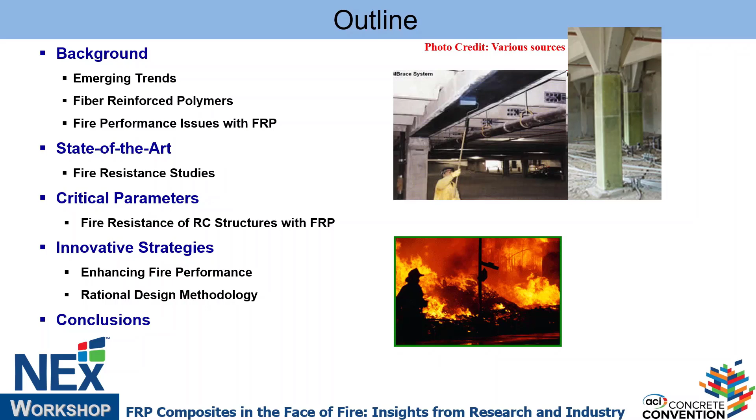As we all know, here we are all experts in FRP as well as in the construction sector. Deteriorating infrastructure is a worldwide problem, especially with respect to reinforced concrete and steel structures, where corrosion is a major issue, along with age-related problems. Secondly, as lifestyles improve and more research and development occurs in most countries, the performance of structures built in the 50s, 60s, 70s, and 80s is being upgraded to account for higher earthquakes, blasts, impact, and other loading types.

Also in the emerging world, the number of buildings is growing. For example, a 6-story building at an airport now wants to add another 4 stories because there's no other space, so they want to strengthen those structures for enhanced capacity. This is becoming common—less so in the US, but outside due to land values and similar factors. According to a health report on US infrastructure by ASCE, this problem is huge even in the US, estimating $3.6 trillion will be spent in the next 10 years. So the construction industry is looking for solutions.

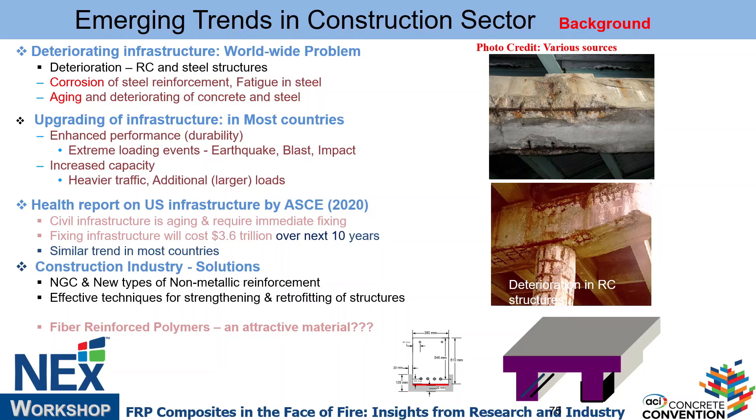FRPs are a feasible and attractive solution for this. Why? In terms of application, it can be used internally or externally. Internally, you can replace it as primary reinforcement, as Steve showed us to some extent, or use it for pre-stressing. Externally, you can add small plates like credit card chips underneath a bridge for flexural or shear strengthening, and on the sides add externally bonded reinforcement, or more attractive, near surface reinforcement, where you cut through and insert bars or strands and fill with epoxy or concrete. This offers either internal or external reinforcement—two types.

FRP has a number of advantages—high strength, lightweight, ease of application, among other things—I won't get into all of them. But there are disadvantages as well. It's brittle, and bond is a major issue. In externally bonded applications you only get bond on one side, unlike when inserted internally where you get bond on three or four sides. Also, FRP is a combustible material, so fire can be an issue, especially when directly exposed to fire, as in the case of externally bonded reinforcement.

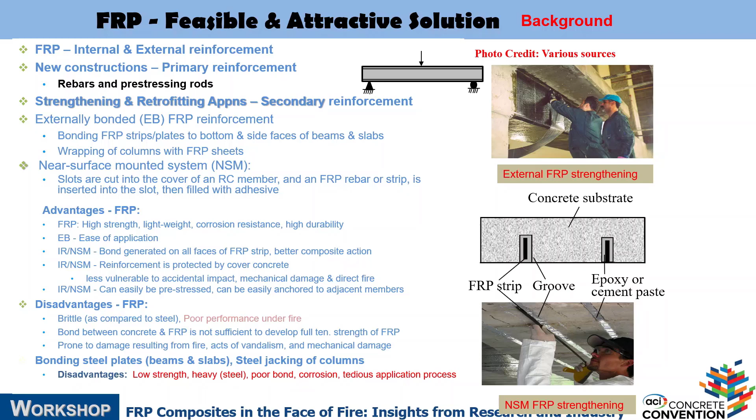But having said all this, it's a much better option than what we used to use, steel plates, which are heavy, right? And even installation is a big problem. So this is a better solution, but we need to address the fire problem.

Why? Fire represents a severe hazard and threat to the built environment. It causes thousands of deaths and billions of dollars of damage every year in every country around the world. Unlike earthquakes, which happen mostly on the West Coast, unlike tornadoes, which are only in the Midwest, unlike hurricanes, which are mostly on the East Coast or the South, unless it's snow, which is only in the northern part, like Michigan or Wisconsin.

But fire is a universal problem. From a small village in Minsk, Russia to Santiago, Chile, fire is a significant hazard to the built environment.

Now if you see the statistics, there were more than 1.35 million fires, out of which 486,000 fires were called structural fires. They grow to the full extent where they can do some level of damage to the structures itself, right? Total losses were more than 50 billion dollars in addition to 3,800 deaths. This was in 2021. So when it happens, fire represents a severe hazard, not only for people, but also for the structure as well as the environment.

It's one of the worst conditions faced by a structure during its lifetime. It can happen through an electric short circuit, as simple as that, accidental, or intentionally through vandalism. Or after an earthquake, a lot of times you have fire. Look at Kobe earthquake, San Francisco earthquake in 1906, Northridge earthquake, also New Zealand earthquake, Chile earthquake. Post-earthquake fires are common. After a truck hits a bridge, the bridge is designed for that impact load, but not for the fire following it.

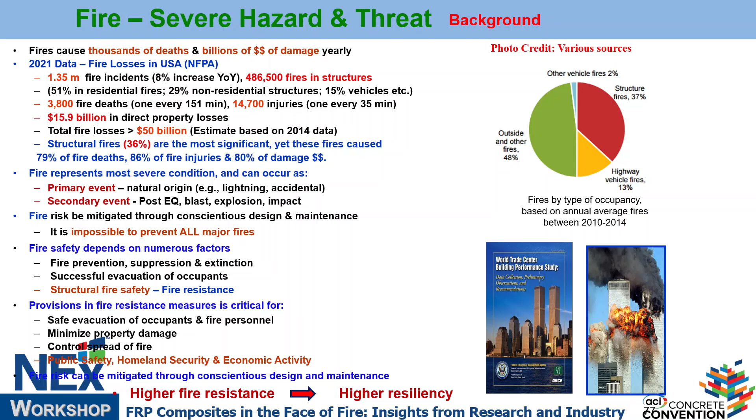Basically as simple as that, that's fire resistance. And it's very important, especially from the resiliency point of view and the life safety point of view as well. Higher the fire resistance, higher the resiliency of the structures. I don't want to get into too much into this.

Fires are real, and it's happening as we speak. A lot of times we assume that fire is a rare event, that it only happened in 9/11, after that no - every year there are fires happening as we talk right now. This is one example - New York City, Bronx, on January 6, 2022, in an apartment building. The residents were mostly an immigrant community. In fact, language was an issue as well.

They were warming themselves up with a space heater, a block heater, because fire affects poorer sections of society much more than rich and affluent sections - weaker sections of society, whether it's elderly people, women, pregnant women, whoever - a weaker section of society, because of their lifestyles, because of the expensive nature of having fire protection systems as well. So in this case, they were warming themselves, kids were playing, it goes out of control, exit paths were not working, a number of things were not working.

8 children plus 19 deaths, right? 3 days before that, the same thing repeated in Philadelphia.

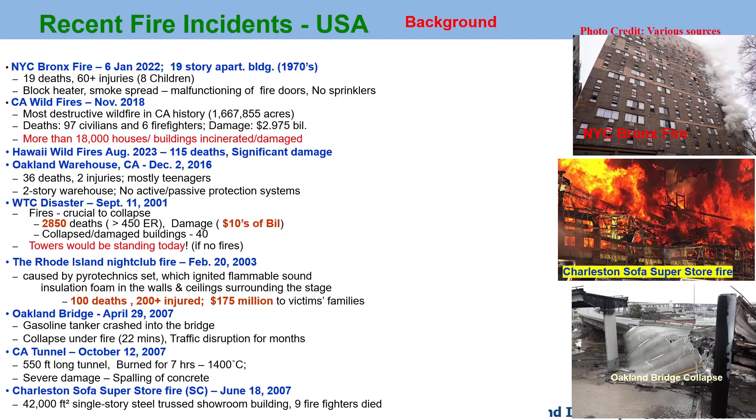Same thing, 18 people died. So this keeps happening, and it's not just buildings alone. I don't want to get into each one of them. You all know what happened on the I-95 bridge in Philadelphia.

This bridge was basically a steel girder bridge with concrete decking on top. An oil tanker carrying 8,500 gallons of fuel flipped on its side. A huge fire starts, fire department comes in quickly, but there's still no way the girders can withstand the fire, and the spans collapse. It took weeks to resolve the resulting supply chain issues.

Remember, in bridge fires, life safety may be of lesser importance. People don't die that much, right? But what happens is the property damage, and following that, these days it's all about traffic. Everyone, we live most of the time on the road rather than in houses.

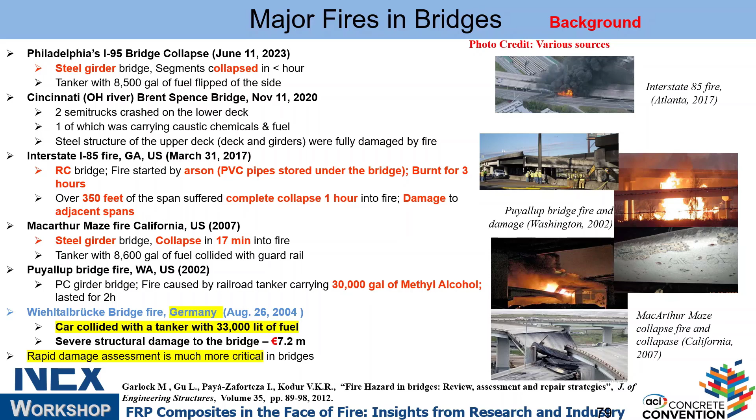So that's why, as Steve said, there's a rethink on these regulations. Now, it's not just one type of incident. As you see, what happened with the I-85 bridge outside Atlanta Airport on I-85 highway? This bridge was in very good condition, reinforced concrete piers, pre-stressed concrete girders. They inspected it in 2015, found everything fine, and the bridge received a good rating. But they found out there were drainage issues.

To fix that, they brought in PVC pipes, and I don't know if you can see that there or not. So they assembled all of them. In the US, our construction season starts in May, so they went away after putting the pipes in February.

A homeless person comes in - this was based on the investigation. It was a very cold day in Atlanta, so he wanted to warm himself up. He put some rubble together and started a fire to warm himself up, with papers and so on. Then he was drinking as well - they found beer bottles right next to him after the investigation was done.

Then it spreads into a fire. A huge fire starts, somebody calls the fire department. It's a major highway. Then, when the fire department came in, they couldn't fight the fire.

Now you know what spalling is - Steve showed it in those girders, right? Now you can see here, huge spalling. They couldn't fight it because fragments were hitting them like bullets. It's called mini explosions. So they couldn't fight the fire. Spans collapsed, and it took weeks or months together to fix it.

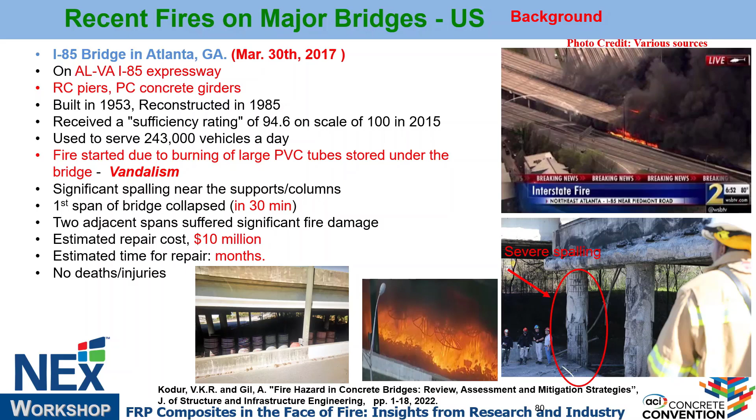Now, what's the difference when you put FRP into this concrete, either internally or externally? As you see, you are dealing with a smaller cross-section. FRP has very good strength properties at room temperature, so you design with a smaller cross-section. But it's a combustible material, unlike concrete and steel - FRP adds fuel to the fire, which you need to account for. Then, what else - you don't have to provide too much cover, right?

All our fire resistance, as pointed out, is based on how much cover you provide based on current codes. You don't need that cover with FRP, you know why? Because it's not corrosive. With steel, that corrosiveness is why we add cover, which supplements fire protection as well. With FRP, the reinforcement is directly exposed to fire, like EB. Before, your reinforcement was directly outside, right? FRP reinforcement is secondary reinforcement.

Then the problem is, steel has consistent properties across almost all grades. But with FRP, your properties change with glass, carbon, aramid - each type has its own matrix as well as fibers. Then you have a much lower critical temperature.

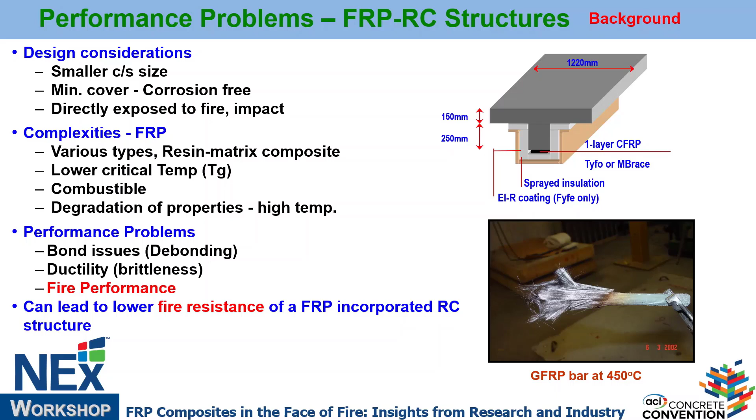Critical temperature, for steel, is the temperature at which 50% of the strength is lost. I'll show you - GFRP and CFRP have much lower critical temperatures, so you lose strength much faster. In addition, you have performance issues such as bond, even at room temperature, and ductility. All this leads to lower fire resistance in FRP structures.

Now, the current approach - as I said, I don't have to repeat this too much - we put measures in to address the fire hazard. It's not that we're inventing this today. From the Hammurabi Code in Iraq, when they developed the code, they had one line for fire design: if fire happens and somebody dies, cut off the hands of the engineer. That's it, as simple as that.

So fire codes were prescriptive from a long time ago. We've moved on to putting in cover thickness instead of cutting off hands - that's all we've done. We still use a prescriptive approach. In this case, we put in sprinklers, smoke detectors, exit paths - active systems.

Many times these active systems are not 100% reliable. Sorry to say that if there's sprinkler industry and stuff, you cannot depend on them. Then the second option - that's the first line of defense. Second line of defense is what? Firefighting.

Firefighting, often, especially in a lot of urban areas—not in the US, I'm talking about across the international scene—today it reaches 2 hours sometimes to reach the firefighting through traffic. Response times are slower a lot of times. Firefighting is 100% not guaranteed to fight the fire very quickly.

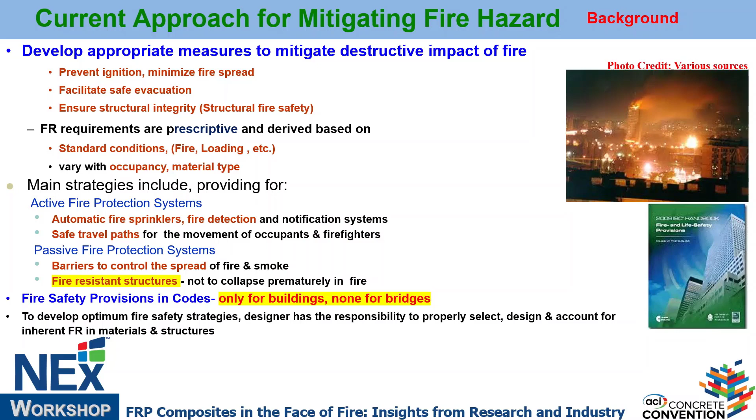The third option, which is structural fire safety, or passive fire protection, is always there. There is no sensor, there is nothing waiting to happen—it's built in, and it's the least expensive option for enhancing the fire performance of a structure compared to active systems. Sprinklers are so expensive, and cities don't have any money in the current way of doing things.

So that's why fire resistance is very important. And this fire resistance depends on a number of things, including how severe your fire is. A bridge fire is much different than a building fire. And when you have FRP, your fire scenario changes.

As Steve was pointing out, we've done a lot of tests over my career. Doing FRP tests, I'm always nervous and don't want to do the test because it's hard to maintain a certain temperature in the furnace. Just like wood, it starts to burn. To control my burners, to put less fuel, is a big challenge, right? So that's a problem.

Then it depends on fire severity. It depends on material properties—we all know FRP properties are much worse than concrete. Then we have structural properties: bond, for example, and what level of load. When you add FRP, your service load levels go up. Many people don't consider that in their test; they still use whatever they use on concrete. Remember, once you strengthen it, your capacity goes up, so you have to increase your service load levels as well.

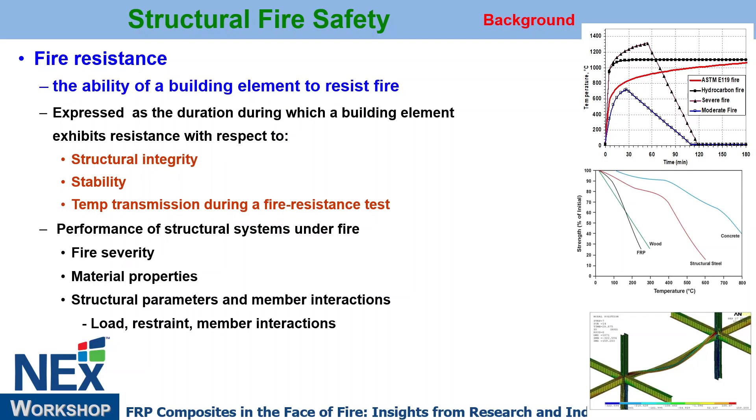For example, restraint, as was pointed out, as well as anchorages is an issue. I have less time for my presentation so I don't want to repeat this, but you can see here—all these issues lead to lower fire resistance.

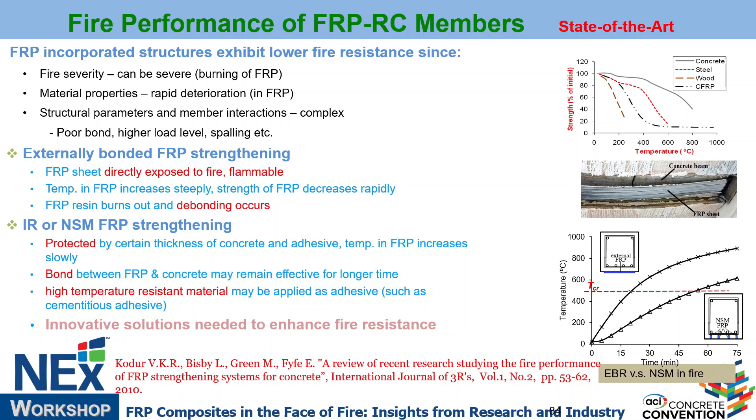One of them, which I think I will use the next couple of slides on, is here. Currently there are major knowledge gaps with respect to FRP.

There is some available knowledge, for example, of what happens in the material itself. Once it reaches TG, the glass transition temperature—it used to be about 60 degrees when we started this work 15, 20 years ago. Now they've moved on to 80 to 100 degrees, or sometimes 110 degrees in current FRPs. Once it reaches TG, the polymer starts decomposing. At 200 or so, much more decomposition happens, completely gone. Around 500 degrees—this graph has moved based on fitting all these logs here, so don't pay too much attention.

I have some test data I'll show you. But anyways, this is the trend at which the material properties, tensile strength for example, degrades.

Now, there are some tests as well—limited test data is available. But the problem is there are no test standards. So a lot of them, when they do it for research purposes, do it their own way. So this is a problem to collect all this data and come to a certain way of seeing what is what.

The next problem is codes and standards. Obviously ACI 440, the technical note, is very useful—what we have in 440—but still it's not in a standardized form where it can go to IBC, and that is what is needed for broader use in the field. Now, Eurocode, for example, says if you add FRP, neglect the FRP from a fire design point of view, or put some insulation around it. That's not the way we should be doing things in 2023.

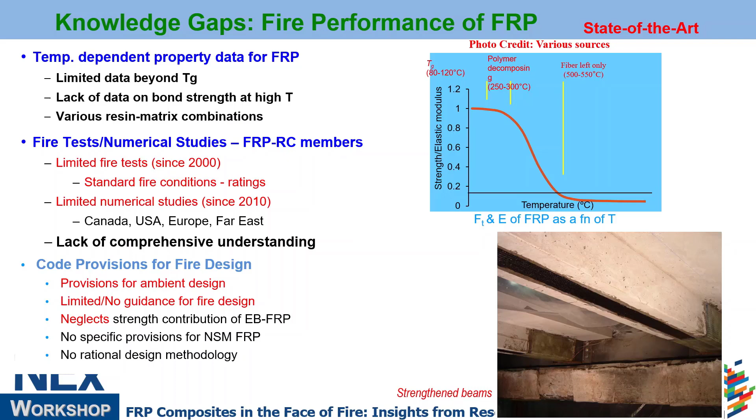We can engineer the system very well. That's what I'm going to show you.

So we've carried out over the last 20 years a lot of work for a number of industries, government, all organizations, specifically talking about FRP, including 5 companies—Structural Technologies, Tarek is here, Master Builders, Mitsubishi. We collaborated with Queen's University; Professor Mark Green is here, over the last 20 years or so. We worked together, developed and did a lot of fire tests. We had unique facilities at both NRC and more recently at Michigan State University. We have facilities to do these tests.

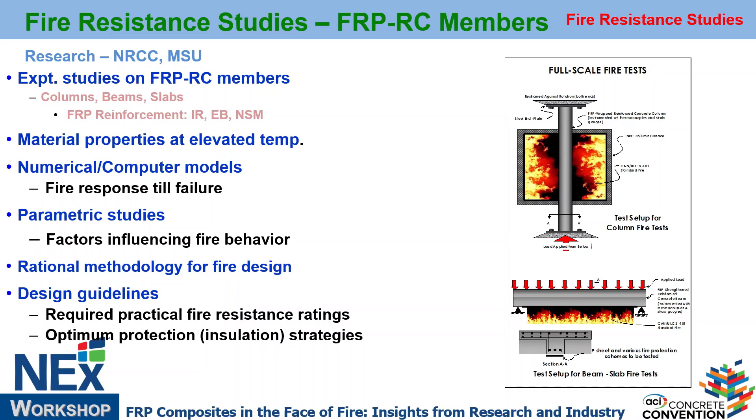You need to develop material properties. That's where if you want to use engineered methods, you need material properties. If you want to use calculations, then you develop some design guidelines after parametric studies using numerical models.

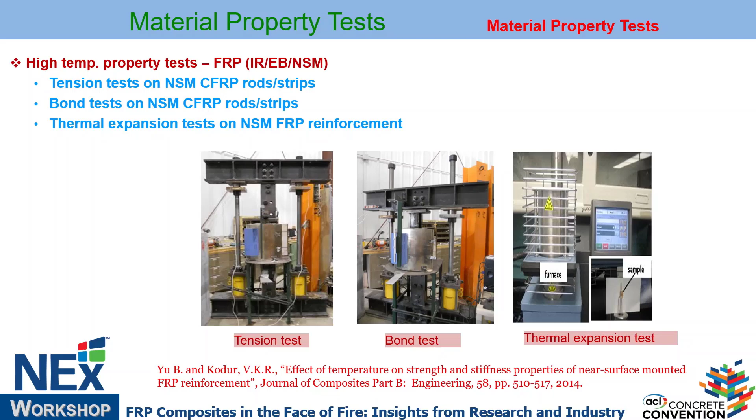These are some tests, and as I said, it's not just for testing structural members. Even material coupon testing - we don't have ASTM standards at elevated temperature, only at room temperature. It's much more complicated because of the grip during the bond test; each thing is a PhD thesis. For example, my students worked on bond strength and had to develop new test methods to address different FRPs and how to get the grip on these materials. So we did many of these tests, both thermal properties and mechanical properties.

Okay, so I was in Canada for a long time. It's hard to get out of these metric units for me, in spite of being in the US for the last 20 years. So sorry about that.

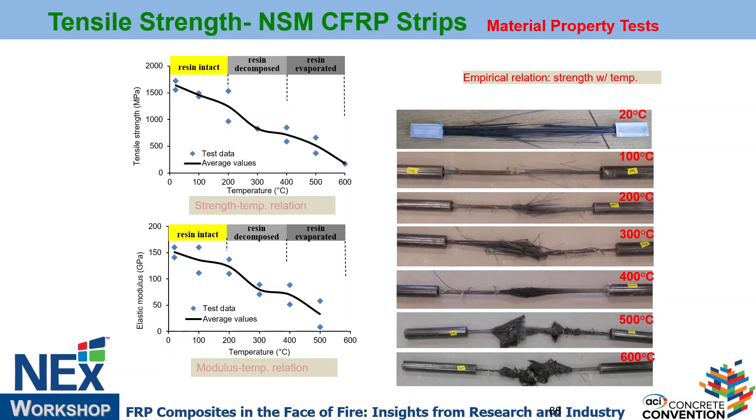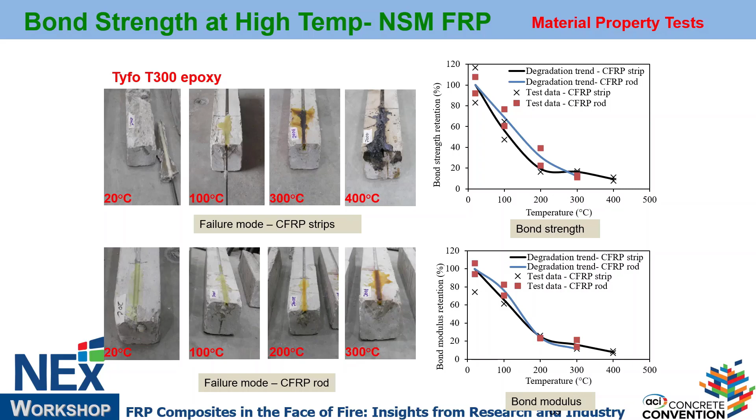Similarly we did bond tests, and as you can see, bond degrades much more rapidly. This is the bond strength with temperature - even after 80 degrees you start to lose bond significantly, and by 200, 250 it's almost completely gone, though the tensile strength in the fiber is still intact. That doesn't help too much, maybe through anchorages it will help. This is the bond slip - bond modulus, I'm sorry.

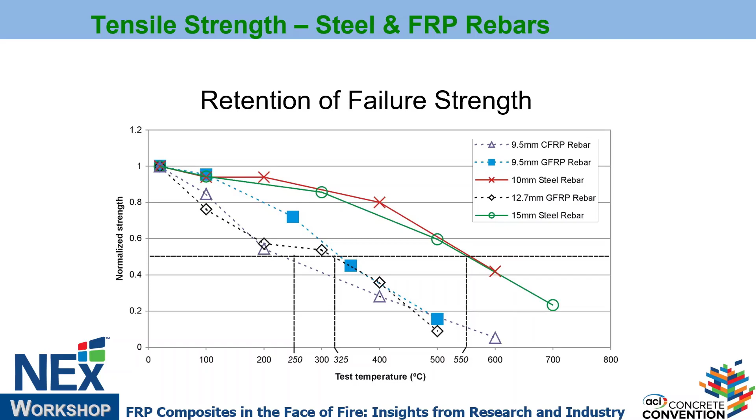As you can see, this is the steel rebars - at 550 degrees centigrade, steel loses about 50% of its strength. That's very helpful for defining failure in steel, called the critical temperature. Look here - this is GFRP, the squares, and this is CFRP, two diameters. GFRP at 325 degrees loses 50%, as compared to 550 for steel. CFRP loses 50% at 250 degrees. So I think this indicates that they lose strength quickly.

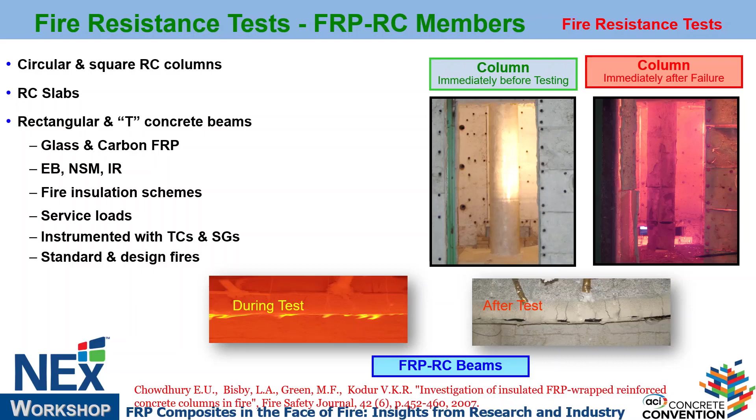Now we tested a number of structural members, including columns, and experimented with NSM, internally reinforced different members, as well as externally bonded ones attached to beams. Beams I just showed you here.

Now just quickly to show - if there is a column here, it's strengthened with FRP. This is all supported by industry, so not much money comes in, and they don't want failure. So we quickly put the insulation on as well to make sure it lasts 3 hours and 4 hours, especially in this project.

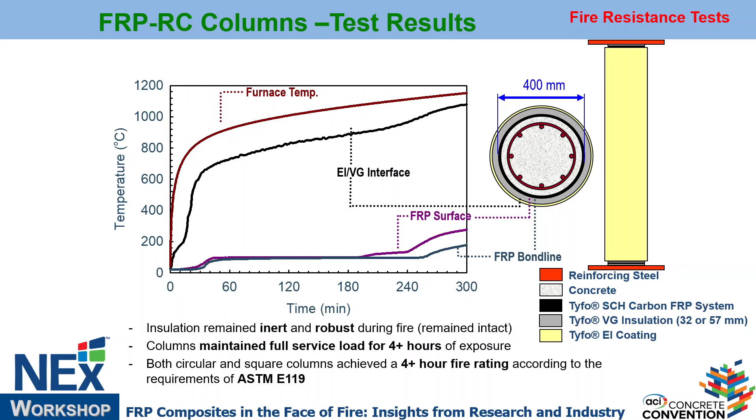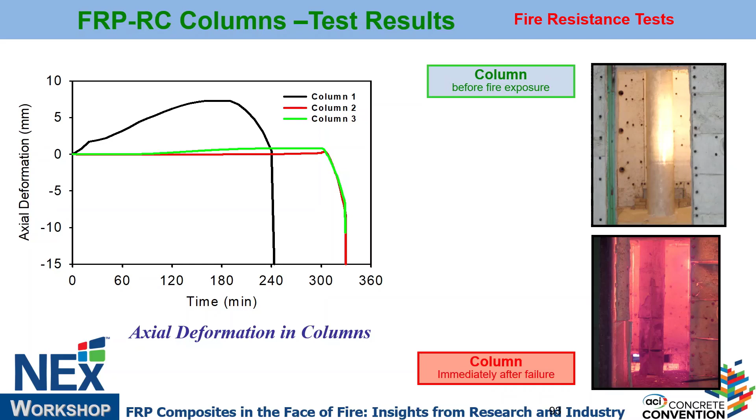The column that was tested was 16 inches square or circular. Now, as soon as the glass transition temperature is reached in this, after that you can see the temperature starts to go up, and the column starts to deflect. As you can see, this is with 1.5 inch thick insulation - this column first expands, then contracts and slides. And these are with 2-inch insulation columns. That's the axial deflection.

Now you have the beams. What about beams? As you can see here, we tested a number of beams.

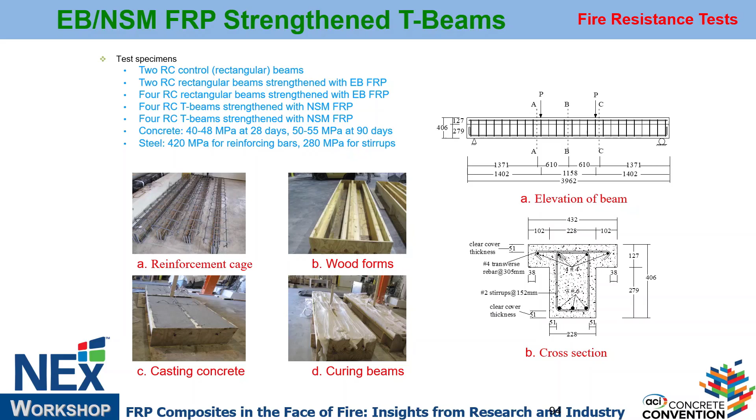I'm going to show you quickly some results from the most recent test. This is beams with near surface mounted reinforcement, where you insert strips into the beams for repair or strengthening applications. We tested this at Michigan State University.

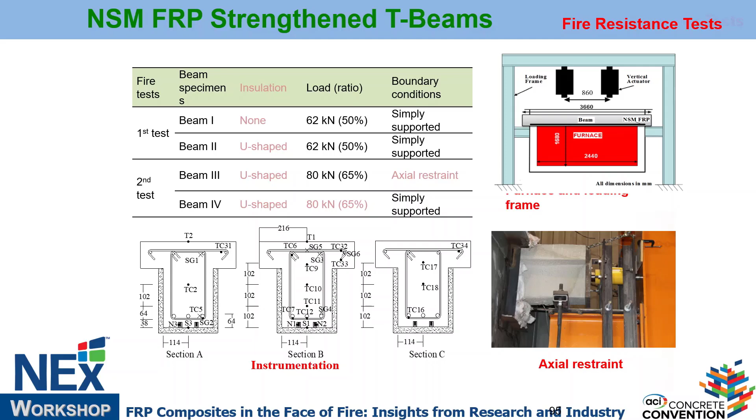What happens? First, we want to experiment without any insulation. Whether we put insulation or not, it may not be expensive, but when you include labor and stuff, it adds up, and a lot of times you don't have enough headroom, right?

In applications, that becomes an issue as well. So without insulation, these are NSM strips. We increase the capacity by 40% by putting those strips, and here we use insulation.

If you don't put insulation, in 10 minutes, in spite of having some concrete cover, about 20 millimeters, ignition happens and the epoxy starts to burn. In 25 minutes, it starts to flake. And at 80 minutes, the cracks are wide open, as you can see in the observations.

But if you put insulation, about 25 millimeters insulation thickness, using a vermiculite gypsum combination, there's no issue at 35 minutes, as opposed to 10 minutes, and 60 minutes as opposed to 25 minutes. So it lasts longer as well.

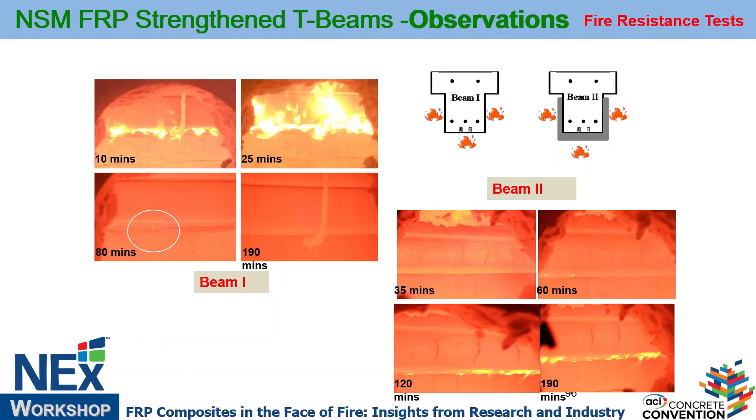It's not just the duration, but this as well. I don't have much time, but you can see here the temperature in the steel rebar. In the case when you use it for strengthening applications, EB and NSM, the steel rebars are very important. It's not just this thing, because if something happens, they have to continue to carry the load if the FRP cannot carry the load.

So these steel temperatures - keeping them cool, this is the steel temperature in the insulated beam. This is without insulation, so this is bad. That can lead to early failure.

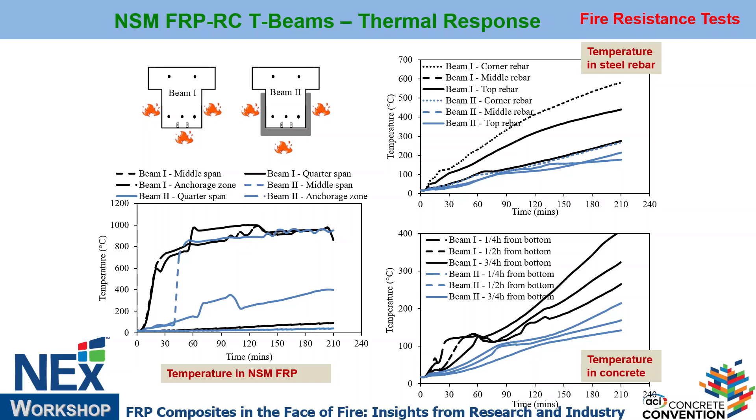In FRP itself, you know that NSM FRP slots, as you can see, if you don't insulate, the temperature rises quickly. They don't have anything to contribute after 15-20 minutes into the fire. So then same thing with deflections.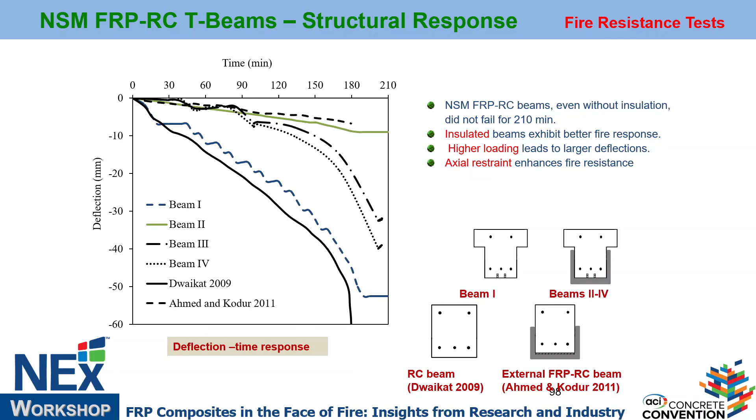And these are NSM. So NSM makes it possible to get required fire resistance without any insulation up to 2 hours - it's easily possible. But with EB, when you put it just outside, it's almost impossible to get more than an hour. You always need some kind of external insulation.

So these are some pictures of BAM. Let me skip that - this is what happens, this is what Steve was talking about, in the anchorages.

If you keep them cool, they try to hold this together and act like a cable basically. Through that mechanism, it continues to carry a little bit of load, even though the fibers are not intact anymore - they are separate, each one of them.

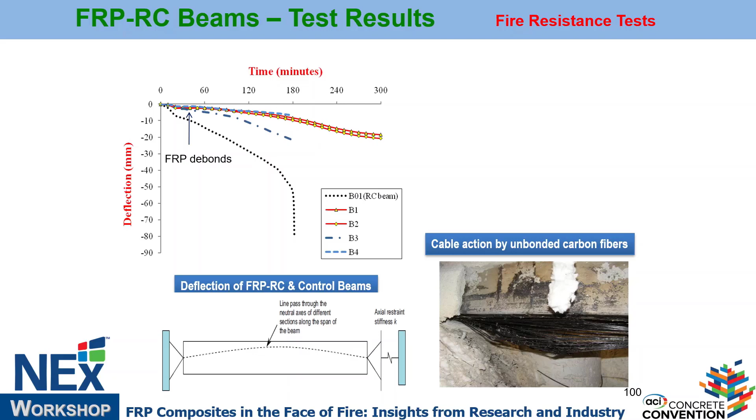So now we develop numerical models. If you want more details, look into the journal papers - a number of them are there. That's not the main point here.

But when you want to model this, it is hard - concrete structures itself is hard to model, especially under fire, because of spalling and other things. Additional complexities such as bond-slip relations have to be incorporated, and these anchorages have to be properly accounted for. It gets extremely complex, so it's hard to do it in a design office.

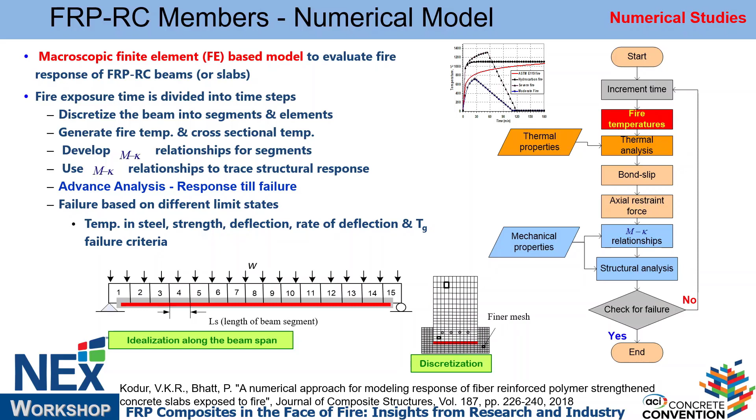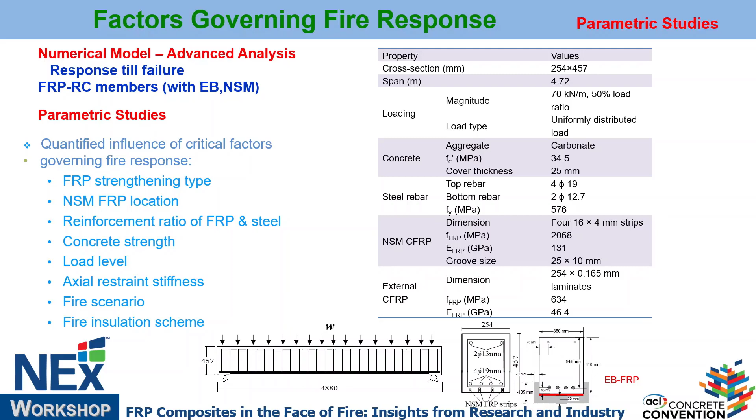So we modeled this through finite element modeling. We developed our own models and then varied a lot of parameters to see what influences the behavior, so that we can engineer the system for better design, rather than just using some test data or one-point test data.

So this is, for example, the type of FRP strengthening. This is a concrete beam - beam 1-1, just a reinforced concrete beam. This one is strengthened with NSM.

This is EB, externally bonded, and this is NSM. Can you see that there is NSM? So in each case, we increase the capacity about 40 to 50% with the addition of EB or NSM.

Now you can see here, in the case of the beam, the reinforced concrete beam capacity is 250 kilonewton meters. Nothing happens up to 70-80 minutes in concrete as we expected, then it starts affecting moment capacity. This is moment capacity. Now if you strengthen it with EB, within 15 minutes or so, glass transition temperature is reached, the strength degrades in FRP, and then it behaves just like a reinforced concrete beam. So the FRP is gone.

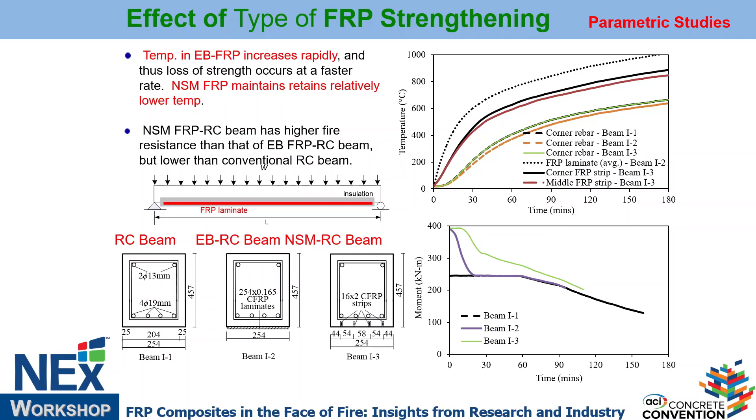Now if you add NSM, as you can see here, though NSM temperatures are rising, they are rising slowly, and after glass transition temperature it drops, but it still continues to have some strength because of the protection it gets from the concrete cover thickness. Gradually it drops. Now let's see, for example, how to strategize even placing this NSM.

If you want to use NSM as the reinforcement, it's not a good option to put NSM across, putting a number of bars, because the heat will be coming at the corners from both sides. So in a fire situation, corner bars will lose strength very quickly. If you can put them closer to the mid span, instead of 4 bars put 2, that gives you additional 5 to 10 minutes at least of fire resistance. When you need 90 minutes of fire rating, you may not need anything else rather than that. So that's a better option.

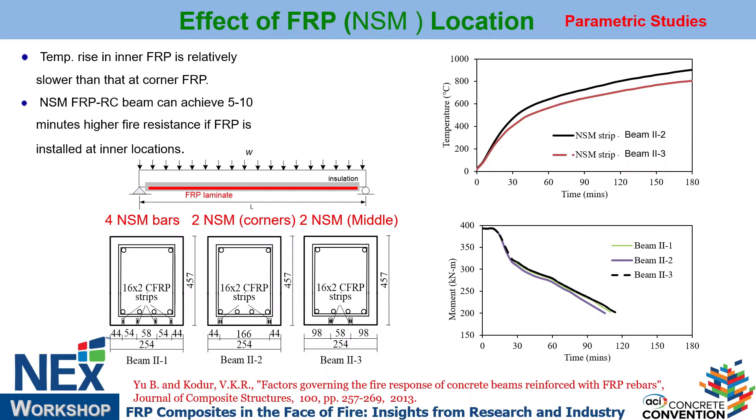Now, what about how much you strengthen? A lot of times material cost is not that much. So what happens is, if you strengthen it, the more the FRP contributes as part of strengthening, the worse it is from the fire point of view. So the lesser the contribution of FRP, if it's 29.1% contribution in this case, it will last 135 minutes. But if the contribution of FRP is 40% plus, then it can fail in 80 minutes. So unnecessarily don't strengthen it too much, you can take that measure.

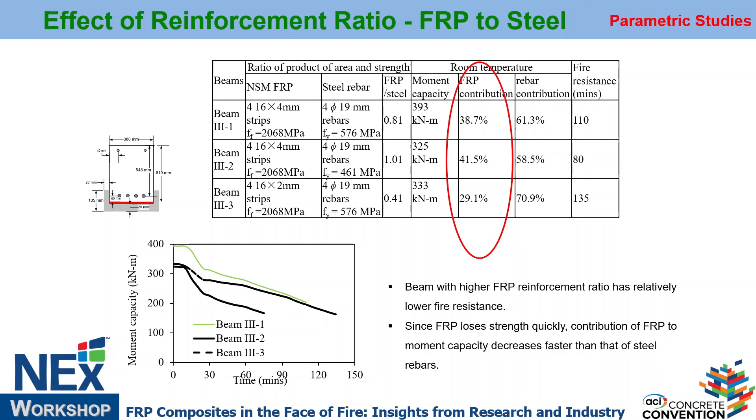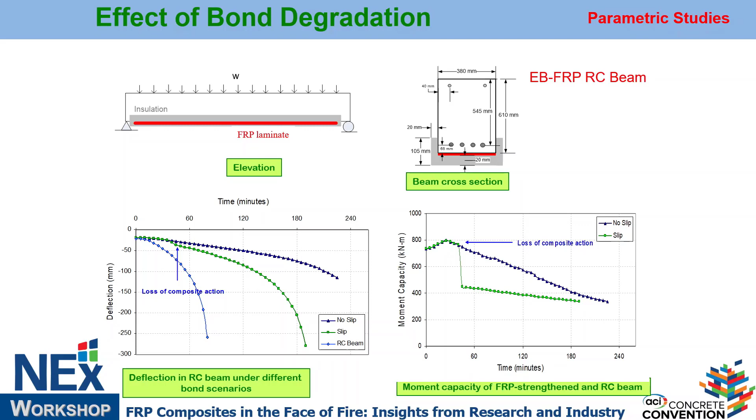Then, what about bond? Bond is a major issue, it has to be accounted for. This is the response of moment capacity, how it drops with time. If you don't account for constitutive relations for bond, then either full slip happens or no slip happens, but in reality it's somewhere in between. And that property depends on the type of FRP, whether you're using GFRP or CFRP.

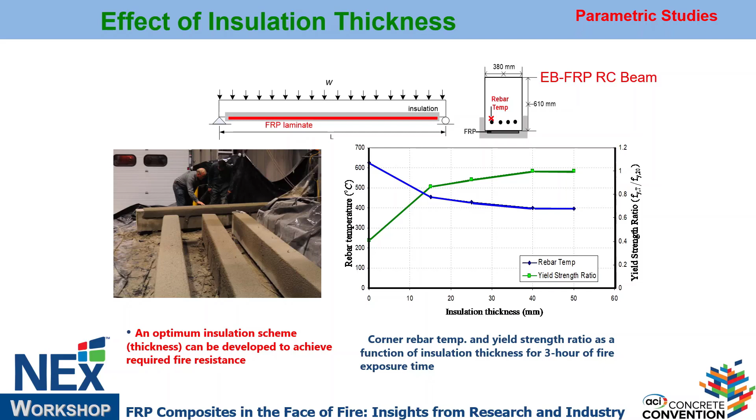That needs special constitutive relations, and how much thickness you need. Remember, as I said, in these beams it's not the FRP only thing you should look at, you should look at the steel rebars as well. So making steel rebars cooler, or keeping them cooler, is very much important. This is, for example, rebar temperature in steel. Higher the insulation thickness you have, lower will be the rebar temperature in steel as well, and that will definitely help to carry more time.

And how do you do that? I'll show you. You need to strategize how you provide this insulation. So when you use externally bonded FRP, right outside when you put it, for example, this is not a good option, just putting insulation underneath the beam. No, you need to take it further, and even providing it to the level of the rebars is not good. You need to take it to 2 times CC, 2 times the concrete cover thickness, to get the full benefit.

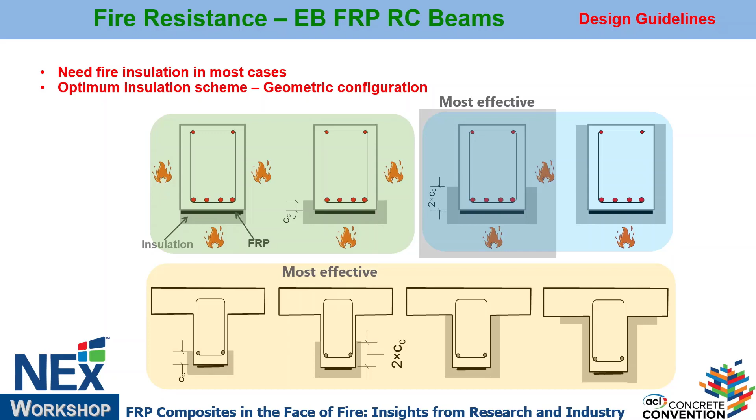Or you can take it fully, but then you are wasting your time, you don't have to worry about that, you are wasting material and stuff. So 2 times the concrete cover thickness is the most optimum. We experimented this with test models. Same thing applies for T-beams as well.

How much do you need? With EB, if you need 2 hours of fire resistance, you need 20 millimeters of insulation. If you need 3 or 4 hours, make sure you extend it on the sides as well, at 2CC, 2 times the concrete cover thickness, as per ACI 318.

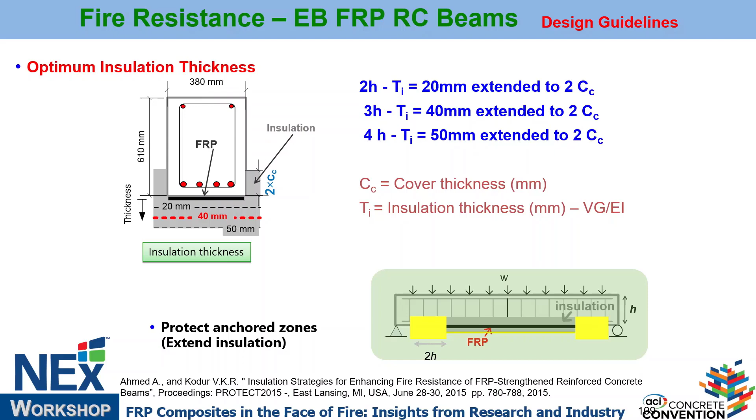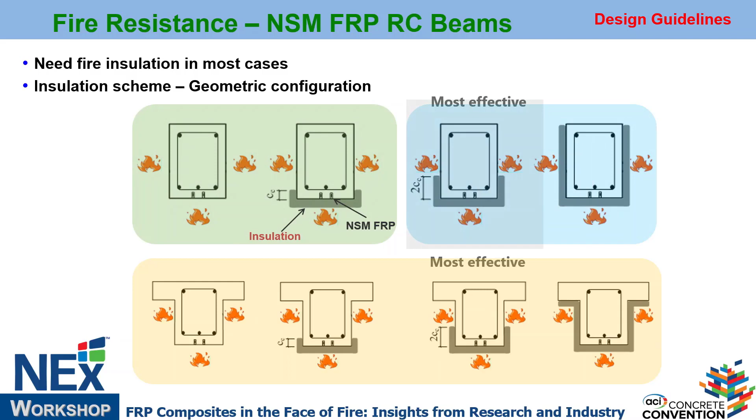Now, what about NSM? With NSM, you can get away without fire resistance measures sometimes, and most of the time up to 2 hours, provided you place the bars only at the center, not at the edge, not at the corners. And how much insulation is needed, this is the most effective way, again 2 times the concrete cover thickness, just like before. How much you need is given here, very similar. You need a certain insulation thickness to get 2, 3, or 4 hours, and you can achieve that.

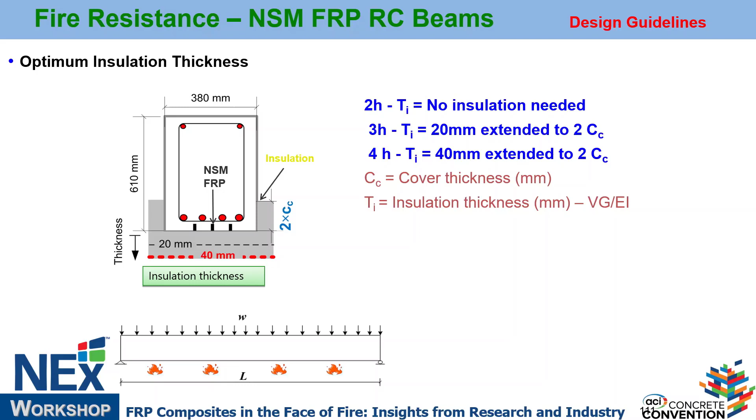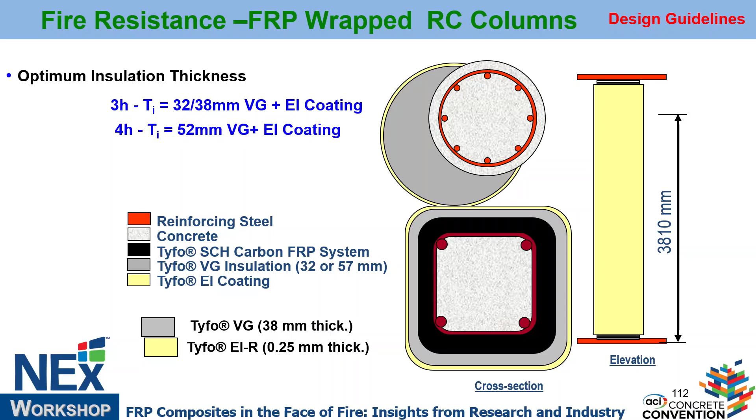Now, columns similarly, up to 2 hours it's possible if you properly design your columns with loads and stuff like that. But beyond 2 hours, it's impossible to get without some level of insulation. Structural Technologies have a very effective insulation, and Fyfe company formerly has developed VGEI coatings, so you can use this kind of insulation to get your required fire ratings.

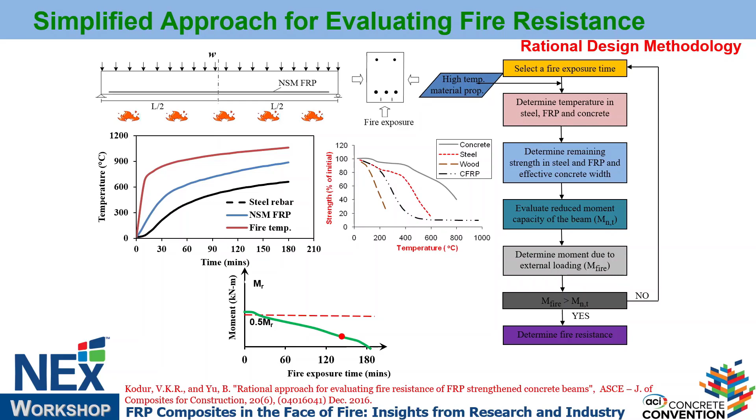We also developed simplified design approaches that can be used in ACI 440 and other documents. It is basically based on heat transfer principles. You calculate the temperatures inside any section, then apply structural mechanics principles to carry out your equilibrium equations, making sure all the forces are there. This has to be done in different time steps. At each time step, check whether the moment capacity is enough to carry that load. If it is, that's fine, so you keep a trial and error approach, but you need material properties.

So I will just explain this slide, one more slide left after this. If you see, this is the beam. Let's assume you are using externally bonded, internally reinforced, near surface mounted, anything you want. Now if you apply these methods, what's the best part? This is the moment on the y-axis for the beam, moment capacity, and the x-axis is at different fire exposure times.

So if you do the calculations, let's say you have a concrete beam, this is a regular concrete beam, not strengthened or anything, and this is how it behaves. Nothing happens for 60 minutes, then it starts to lose capacity. Remember, it has to carry lower service loads. Because of that, your concrete beam fails here, because the load level is approximately 50% of the capacity, service load, so it fails right here.

But if you strengthen with EB, you increase the capacity 1.5 times. So then, one day there is a fire here, it starts to decrease. Because your glass transition temperature is reached, it starts to behave just like a concrete beam, but it fails here because it's carrying a higher service load.

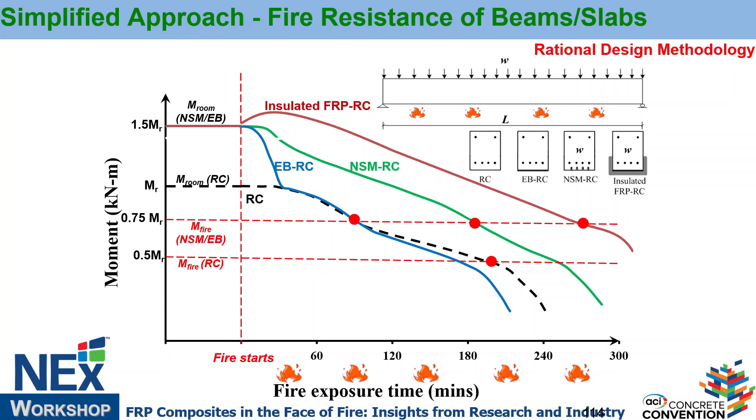Now, if you put in NSM, look at this here. Why? Because with NSM, due to the cover thickness you provided, the temperatures increase slowly. So it retains more strength, and it fails somewhere here. But if you insulate the same EB, which failed here, you can push the failure point wherever you want depending on the insulation thickness and its properties. So this is how the fire behavior of these beams is.

So finally, these issues can be addressed. This is not a big science or anything. A fire problem can be easily addressed, but it needs a lot of material level data, as well as some validation test data, which are expensive under fire exposure.

Now, FRP up to 200 to 250 degrees centigrade is no big deal, you can manage. But beyond that, it loses strength much faster and more rapidly as opposed to steel, where up to 400 degrees not much issue. Now, reaching Tg does not mean failure, which some reports suggest—that after Tg is reached, it should be neglected. It's not. Still, it's contributing to some extent.

Okay, so that is where the calculations are very important. Now, simple modifications such as adjusting the reinforcement ratio, or how much to strengthen or where to place the bars—these strategies can help to get across the borderline without insulation sometimes.

A lot of further research is needed, and I would like to thank NEx, for example—we are doing a project for them, developing this. People are doing tests, but not paying attention to all the nitty-gritties of the test. Otherwise, the tests cost $30,000, and you don't know how to condition the specimen, what instrumentation has to be done, what failure criteria has to be applied. It's not in ASTM, it's not in ISO. So that's where we are focusing currently on one of the projects.

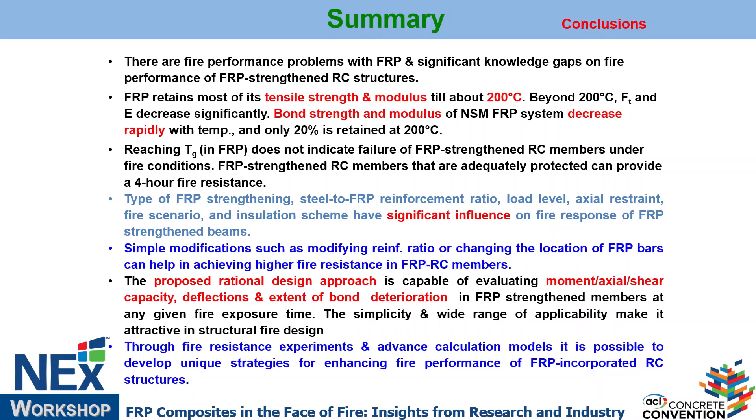So finally, I would like to thank many people, including the sponsors. This is about $5 million plus in projects we did over the years—Mark Green is here, PCA, CTL, so many, Argon-X right now, Structural Technologies, Fyfe Company. There is very limited information and detail on how to do these calculations, there are no books, as you know. We have a new book with a chapter of about 40 pages published by McGraw-Hill for FRP design, what to be done. Thank you very much.